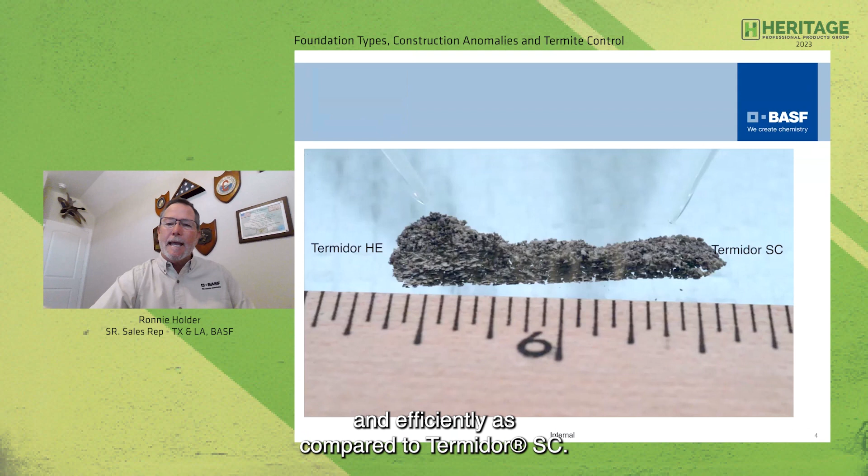So one thing I always like to do is show people this video of Termidor HE and how it works and penetrates into a termite shelter tube. Termidor HE has a proprietary BASF polymer that allows it to drag itself into that shelter tube much more quickly, thoroughly, and efficiently as compared to Termidor SC. On the left, we've got a drop of HE. On the right, we've got a drop of SC.

So you can imagine the benefit of using Termidor HE as it relates to the reduced volume that you put in the soil, the reduced trench size that you have to dig, and the reduced time it takes you to actually do a subterranean termite job. I especially like Termidor HE because if you foam with it, you're going to get penetration into a Formosan carton nest and/or an eastern subterranean termite shelter tube a lot quicker than with SC. So that might be something you want to consider putting in your arsenal as far as foaming inside of wall voids for subterranean termites.

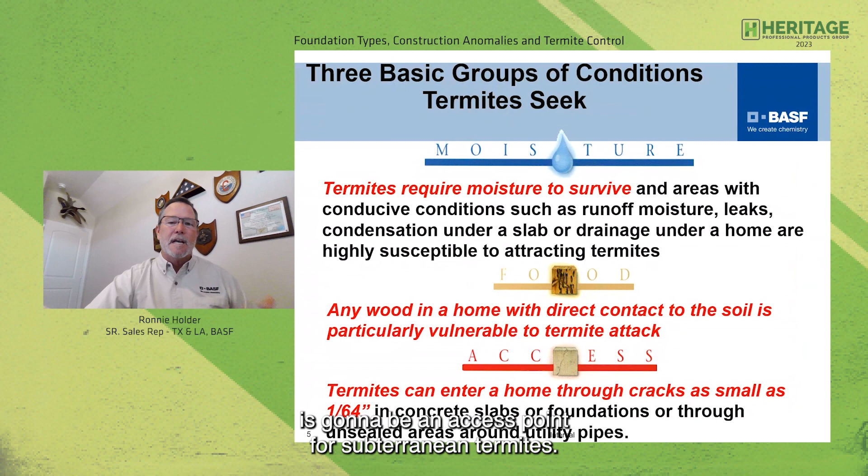So just like every living organism, termites need what? They need moisture, they need food, and they need access to the structure in order to get in there and find a food source, okay? We know that termites can enter a structure in a crack as small as 1/64th of an inch. So that means every plumbing penetration, every potential crack, any potential slab penetration is going to be an access point for subterranean termites.

So when Mrs. Jones calls you out and she needs a termite estimate, there's a few things you need to figure out. Number one, is it a curative treatment? Number two, is it a preventative treatment? If it's a curative treatment, we certainly want to identify where the termites are coming from, if at all possible. And then there's other things we need to consider.

What type of construction is this? Is this a slab? Is this a floating slab? Is there a basement? And one thing I always like to do is look at the roof line right here from this street view, because if there's a change in this roof line, it's very possible that we could have an addition onto that structure. And if there's an addition, we all know that that's a potential expansion joint where the two separate pours of concrete come together, which can be a major access point for some subterranean termites.

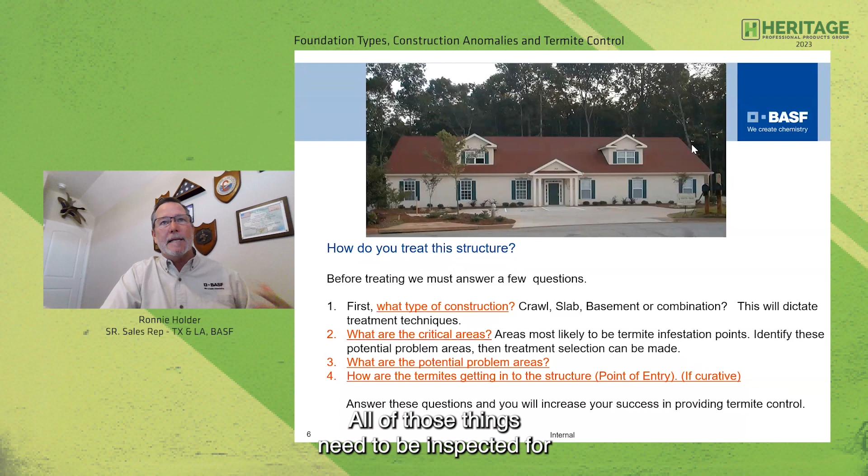We want to understand the conducive conditions. Is the soil too high? Am I able to access the slab and make a thorough inspection around the whole entire exterior perimeter of that structure? What are the critical areas? What are the potential problem areas? Is there wood rot? Is there a leaking roof? Does the chimney leak? All of those things need to be inspected for, as well as identified and documented on your paperwork.

We always want to recommend that Mrs. Jones move that wood pile outside and away from that structure, so she's not drawing subterranean termites, carpenter ants, wood boring beetles, or anything that close to the structure.

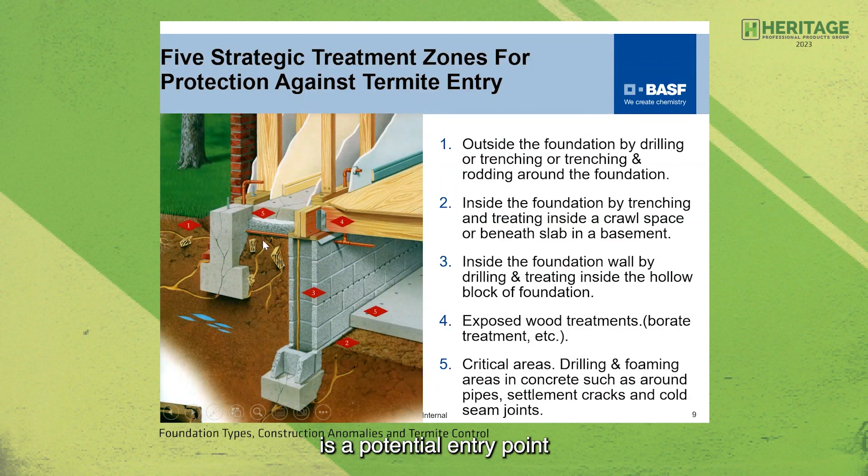So that means we have an expansion joint all the way around the interior of that structure. Also, potential entry points are the hollow blocks themselves. Every place that you see a red diamond is a potential entry point as well as a potential treatment point.

Okay, so let's take a look at some of the tools. Obviously, we needed graph paper, pencil, ruler, clipboard for the diagram. The diagram should have the outline of the structure as well as location of existing damage, tunnels, wings, or active subterranean termites or even drywood termites.

This is the big one right here: evidence of other wood-destroying organisms. So as a pest control professional, the TDA and Oklahoma Department of Agriculture, most all of your government entities require that you document other wood-destroying organisms. That would include drywood termites, carpenter ants, or wood-boring beetles.

Need to note the conducive conditions. Those are conditions that need to be corrected if at all possible to prevent the subterranean termites from living in, so let's say a windowsill that's been leaking and we've got moisture in that area. The termites could be living in from that moisture and not returning to the soil where your treatment would normally be.

Once again, we want to document any expansion joints, changes in the grade. If you're in the rural areas, location of wells or cisterns is very critical, because if there's a well or a cistern, chances are there's only a few products, and they're mainly baits, that I could actually use to solve subterranean termites in a well house on a structure.

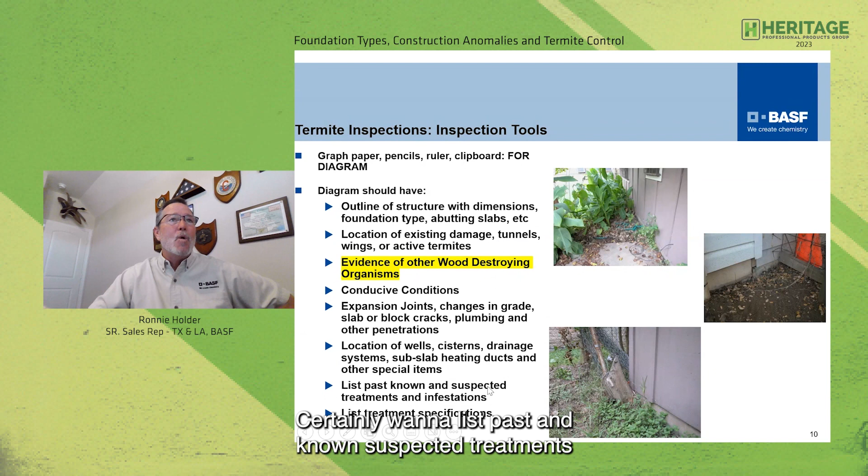Certainly want to list past and known suspected treatments and infestations. And then we want to certainly list the treatment specifications.

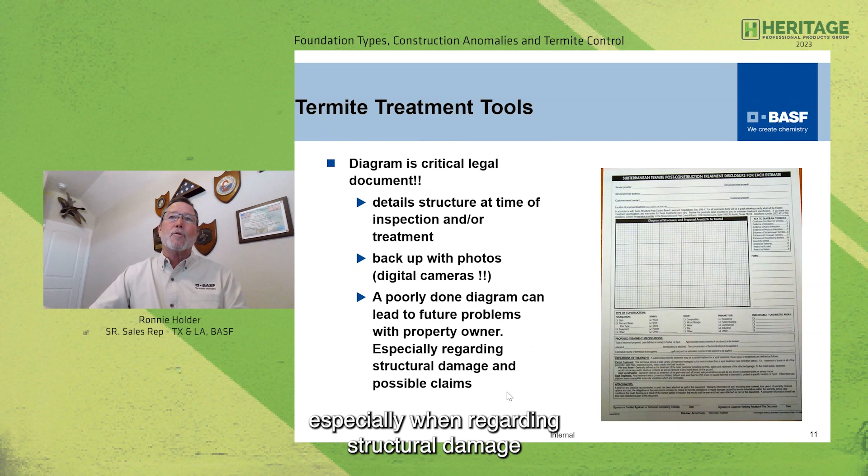So if you're going to get sued for a termite job, what's the first thing the attorneys are going to ask for? Number one, they're going to ask for your subterranean termite service agreement as well as the diagram. In today's world, we can back up our diagrams with pictures because every one of us has a camera on our phone. This document, along with several pictures showing conducive conditions, areas of activity, and anything critical to this structure, should be attached to that. The main thing to remember is a poorly done diagram can lead to future problems with the property owner, especially regarding structural damage and possible claims.

So let's take a look at some real world diagrams. I promise you, I have gotten these over the years, and these were left with customers that PMPs actually proposed subterranean termite treatments for.

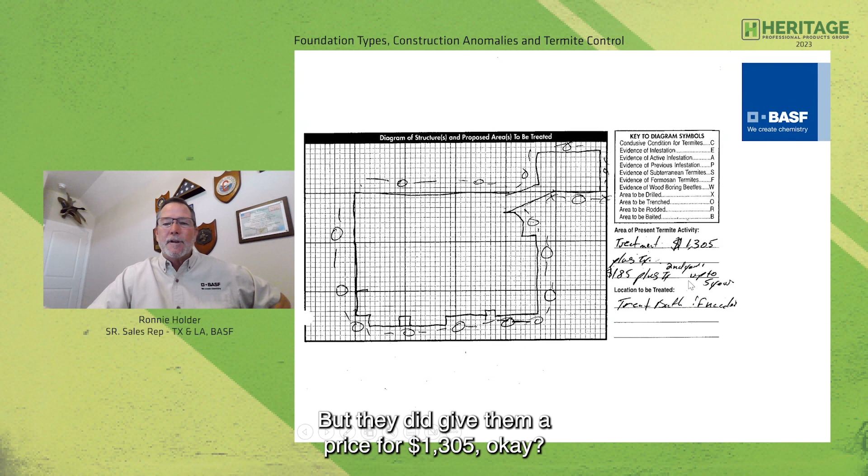Number one, my 8-year-old granddaughter could draw a better diagram than this. Let's use a ruler, keep it neat, keep it straight. And we're certainly missing all of the linear footage. But they did give them a price for $1,305, with a $185 annual renewal. Where's the bath trap? Where are any of the plumbing penetrations in here? Did they even bother to inspect the attic?

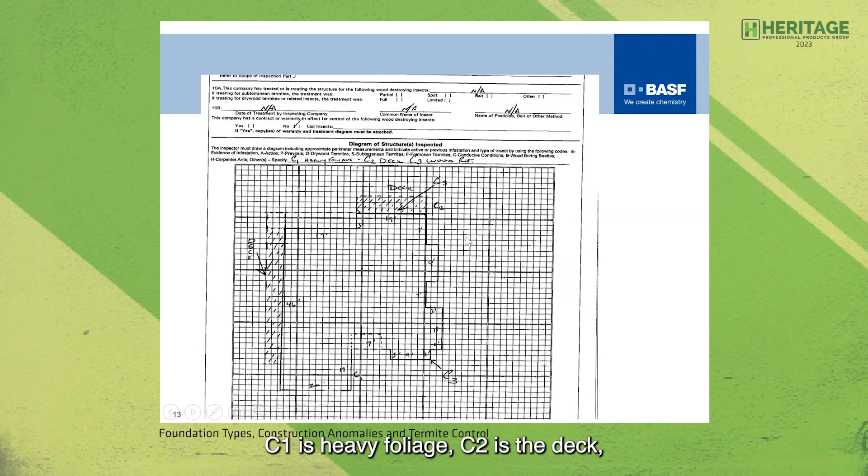This one here is pretty good. We've got a legend up here: C1 is heavy foliage, C2 is the deck, and C3 is wood rot. We've got our dimensions, our linear footages around the structure. So that's nice, neat, and clean. But here again, what am I missing? What about the inside? What about showers? What about bath traps or any other potential entry point for subterranean termites?

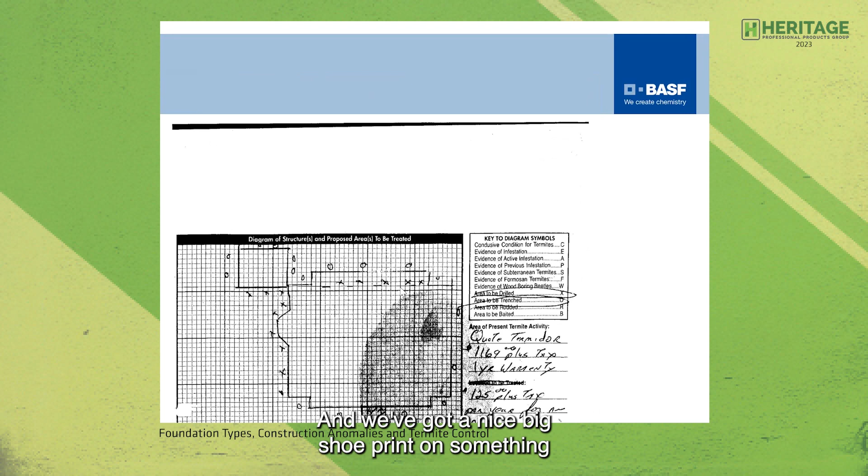If you ever leave Mrs. Jones an estimate with your boot print on it, shame on you. At the end of the day, obviously it was windy that day. The paperwork blew off the clipboard, and this person had to use their boot to actually stop it from blowing away. And we've got a nice big shoe print on something that we're going to actually leave with the customer. Not very professional.

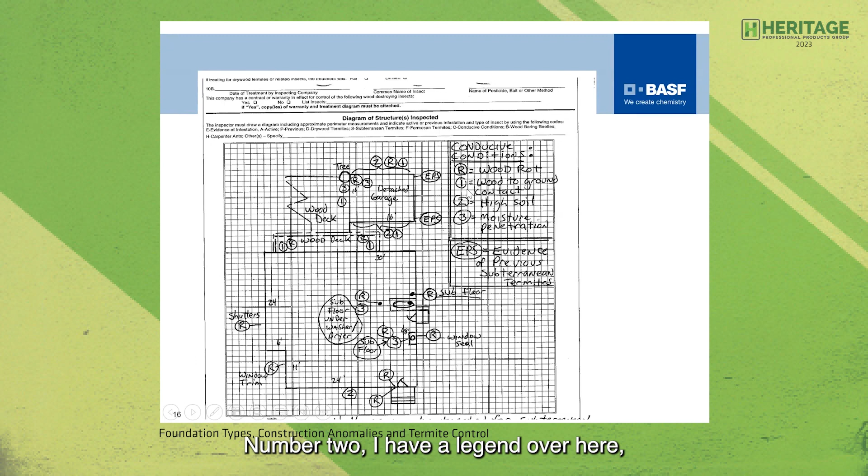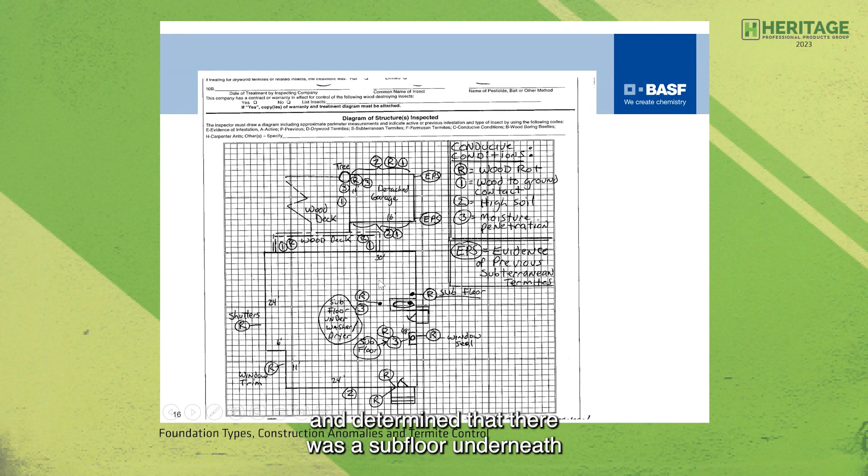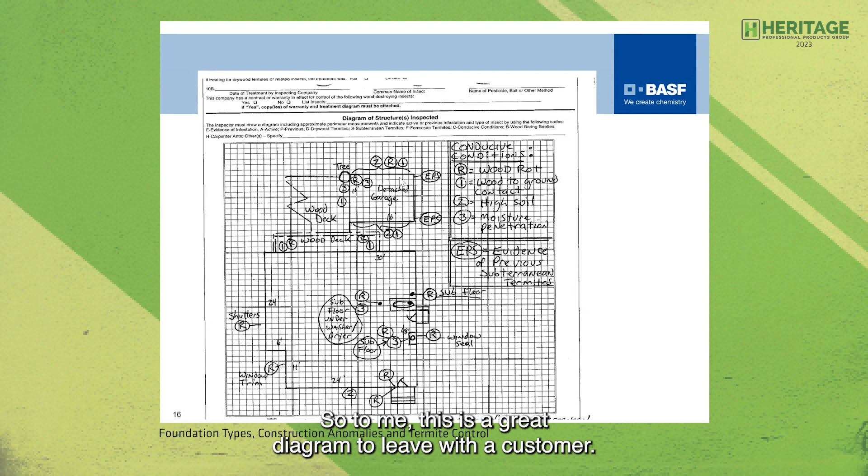To me, right here, this person has taken the time to give the homeowner a snapshot of what's going on around their structure. Number one, I've got a great clean diagram with linear footages on it. Number two, I have a legend over here where R is wood rot, and number one is wood to ground contact and high soil moisture penetrations. All of those are conducive conditions. And if you notice here, EPS is evidence of previous subterranean termites. We move over here into the house. They actually have the bath trap drawn. This person also inspected the washer and dryer area and determined there was a subfloor underneath that area. They've got the wooden deck marked up here with the detached garage, another wood deck, and then also all of the legends up here as far as what's going on. So to me, this is a great diagram to leave with a customer. You give them the estimate based on this, and chances are really, really good that you're going to win the day and win the job.

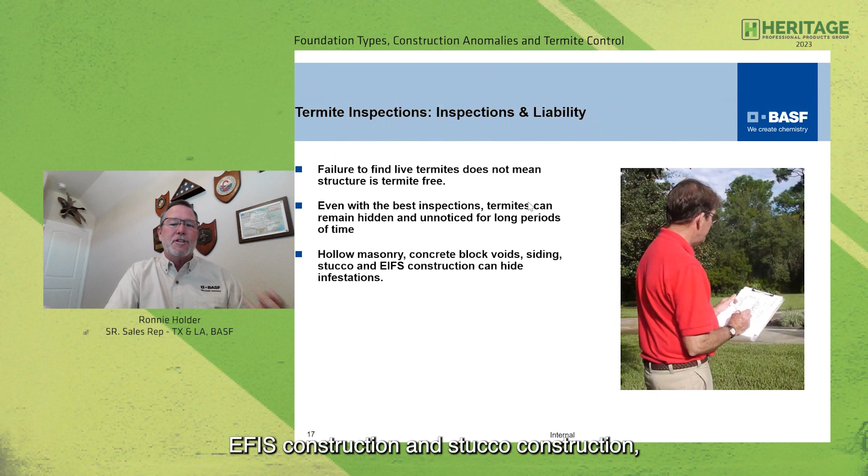Just because I don't find subterranean or drywood termites, do we tell the customer that their home is termite free? The answer is absolutely not. The reason is because even with the best inspections, even with moisture meters and FLIR guns and things like that, termites can remain hidden and unnoticed for long periods of time. Hollow masonry construction, like we saw on one of those first slides, with the floating slab and the hollow cinder block stem wall, those can hide areas of infestation. EIFS construction and stucco construction can hide termites in those areas, and even with the best inspection, we can never find them.

So I like this statement right here: the inspector puts himself and the company's integrity on the line every time an inspection is done. Make sure you document all damage, conducive conditions, and recommendations, and those need to be presented to the homeowner and or their agent. Follow the laws and regulations for whatever state you're in, whether it's Texas, Louisiana, Oklahoma, New Mexico, Florida, wherever you might be—follow the WDI regulations.

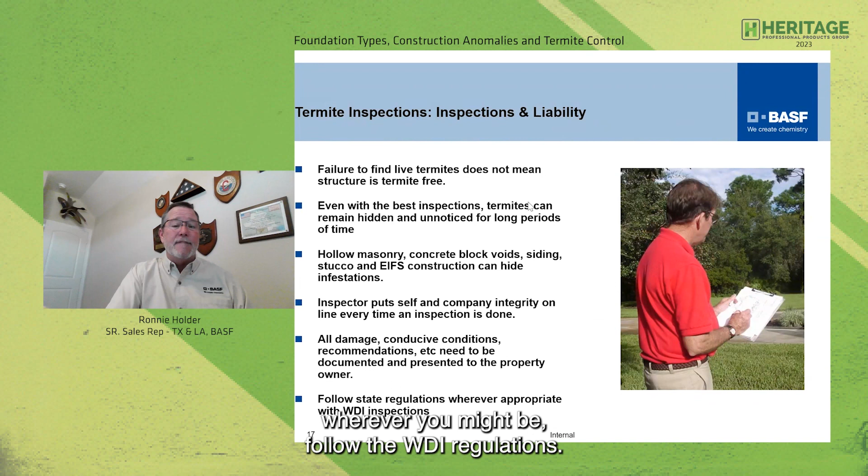So let's take a look at some simple construction terms. And one thing I want you to remember is that construction changes over time. Okay. So in the late 1800s, early 1900s, what was the primary construction type of residential structures? Well, it was a pier and beam, a crawl space structure, right? It wasn't until after the 30s, during the 30s, 40s, and 50s that they perfected the use of concrete to

start making slabs. Okay. So the older the neighborhood that you're in, the more likely you're going to have pier and beam construction. And as newer neighborhoods get built, the construction type changes over time. So just be sure to kind of understand what part of town you're in. Is it new construction? Is it older construction? And document from there.

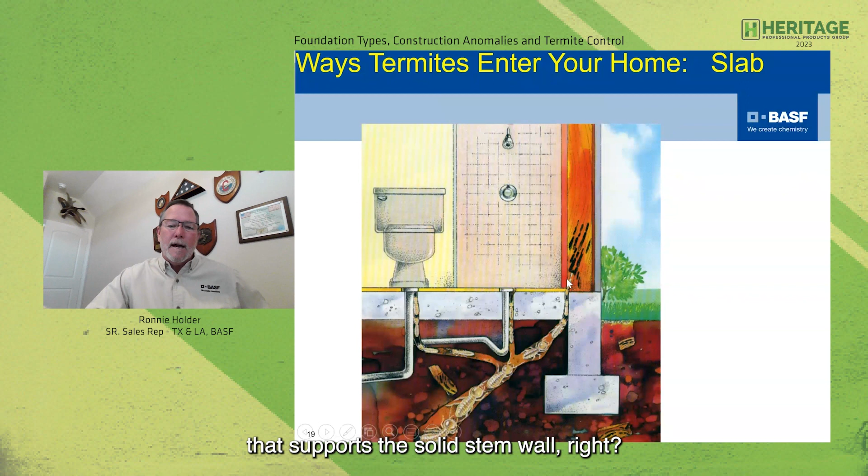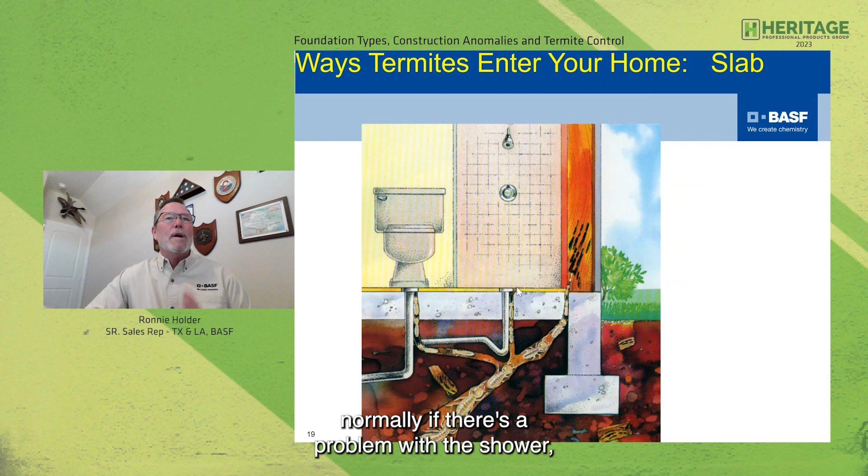This is a great picture of a floating slab. On the right-hand side, we've got a footing that supports the solid stem wall, right? And then you've got that expansion joint all the way around the interior of the structure. So our entry points include that expansion joint on the inside. It includes any plumbing penetration, okay? Commodes, probably not the shower. Normally, if there's a problem with the shower, it's due to a leaking shower pan.

Okay. So back in the 50s, 60s, 70s, they had shower pans made out of galvanized. And then once the mortar on the floor of the shower started giving away and losing its seal, guess what? It would drip onto that galvanized pan. It would rot out that pan. And then the moisture would leak into the form boards that form out the wall of the shower as well as the floor. So if you have problems with subterranean termites in the shower, never come here and drill a hole right next to the shower drain. And the reason for that is you could be drilling a hole right through a shower pan.

So this is one of the most common building types that we see throughout the whole country, really, is a monolithic slab. Mono means one. That means all of the slab was poured at one time. So what are my potential entry points? Certainly the exterior perimeter, okay, especially anytime you've got a 90-degree angle in the slab. Termites love those corners. Any penetration through that slab, whether it's a drain line, water lines, electrical lines, anything like that is a potential entry point. And then if this monolithic slab cracks, any crack could be a potential entry point.

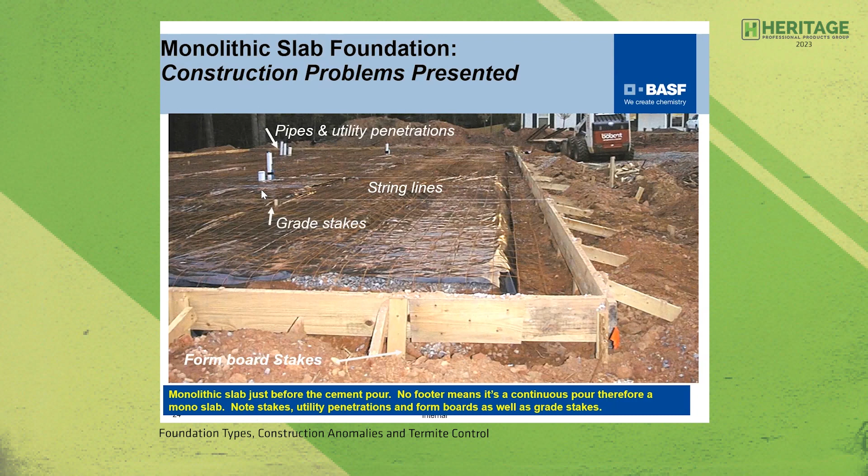So let's see what happens after they pour the slab. Oh, well, guess what? They didn't pour it high enough to cover these two grade stakes. So we said first on that termites need what? Number one, moisture, which is the soil. Number two, they need access, which is going to be these grade stakes. And number three, they need a food source, which is also going to be these grade stakes.

Now, here in the state of Texas, it's not required that pre-treats be done on residential structures unless it's certain municipalities that require that. So what's the contractor going to do? He's basically going to grind these down off even, and he might put a little mortar mix over the top of them, but it's doubtful. I mean, the foreman might not even be on the job.

So after the concrete's cured, they're going to put up their walls. They're going to put down their carpet and the pad underneath. And you will never know that food source and entry point is right there. I mean, there could be a wall right over either one of these grade stakes, and you would never know that it's there. So it's these construction anomalies that we need to be concerned with.

So normally when we do a termite job and we're using Termidor, we do it one time and then we solve the problem right away. It's that second and third year, if you still have issues, you need to start thinking outside of the box to determine what could have happened during the construction process that's still causing these subterranean termites to be active and prevalent in the structure.

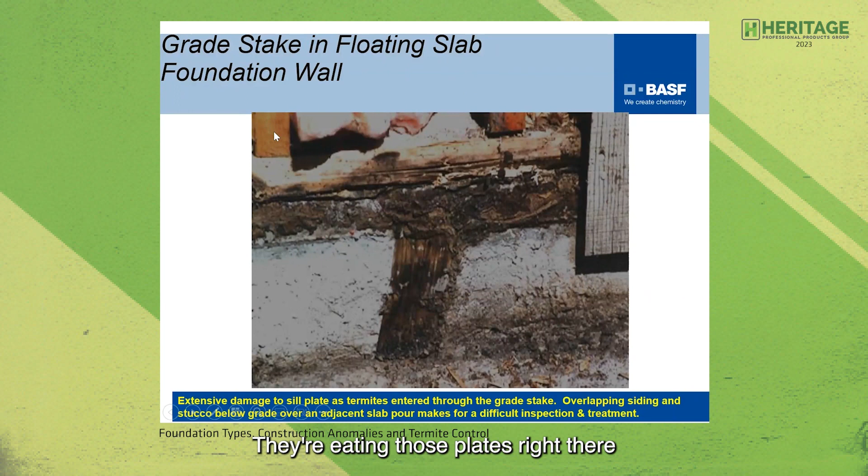This is a great slide of a grade stake left in the ground in the slab. So number one, we've got food source, we've got moisture, we've got access. They're eating this grade stake, and now guess what? They're eating those plates right there that support the studs, and eventually they'll come and start eating on the studs as well.

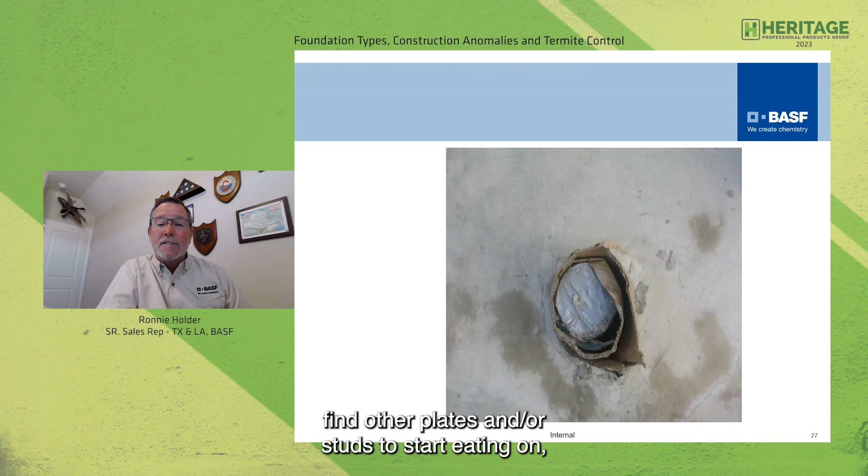They love the heck out of it, especially if it's got moisture in it, and that would be a great place for subterranean termites. Number one, to access the structure, find other plates and or studs to start eating on, and chances are you'll never even know that that's there.

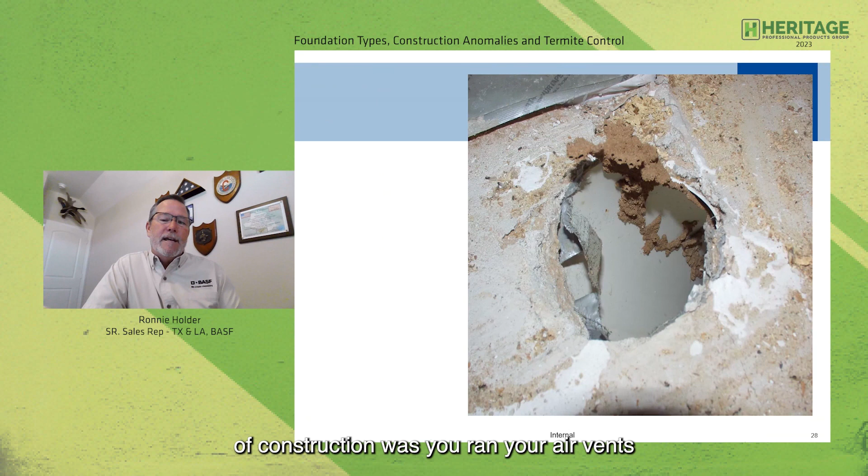So this is some construction from Oklahoma. Years ago, I covered Oklahoma for BASF. And for many years, the Oklahoma standard of construction was you ran your air vents and air ducts through the slab. Okay. So what they do is they'd hook these galvanized pipes up for the ventilation system for the structure, and then they'd pour the concrete.

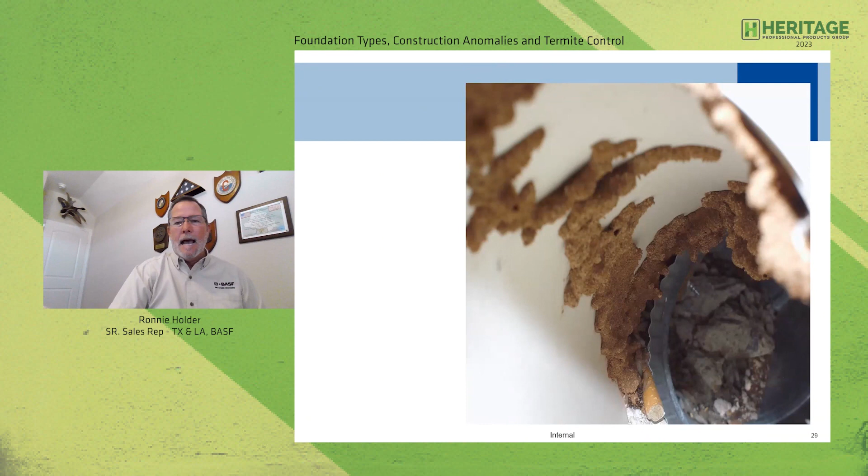Well, what happens to galvanized over time? It tends to rust out, right? And then anytime you've got two pieces of galvanized come together, guess what? There's enough of a gap for the subterranean termites to get into those areas as well. Notice here how they put the PVC attached to the galvanized. And I like the fact that the contractor left his Marlboro cigarette butt right here for the consumer as well.

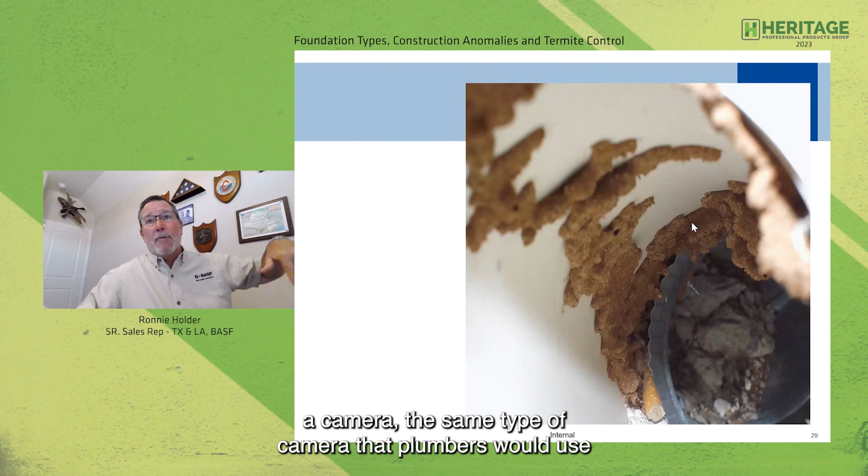So how do you treat these things? I had a very good customer in Edmond that used to use a camera, the same type of camera that plumbers would use to inspect the sewer lines and things like that. He would put a camera down in here to figure out exactly where the subterranean termites were coming from. And then he would drill holes, very tiny 1/4-inch holes, and then treat those areas in and around where the subterranean termites were.

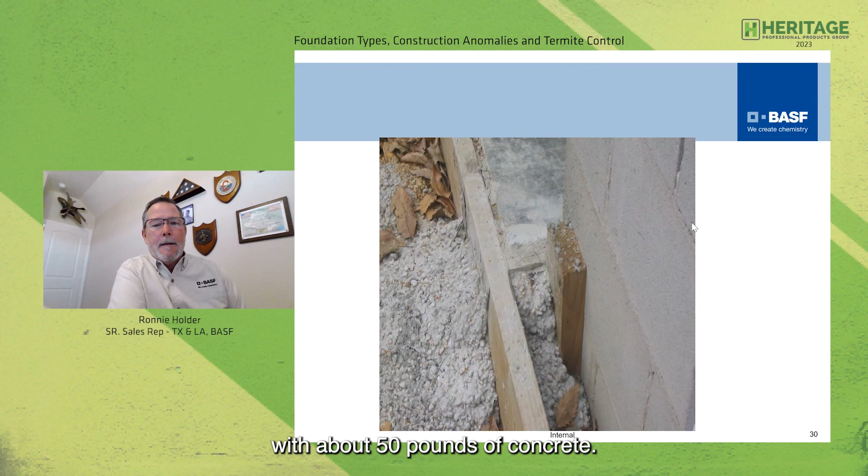So this is a great picture. We've got form boards left in place, encased with about 50 pounds of concrete. What do you think is going to happen here? Well, when I came back 3 months later after they had finished the house on this picture, the contractor had put 2 feet of soil right over this area and then put landscape material on top of it and called it a flower bed.

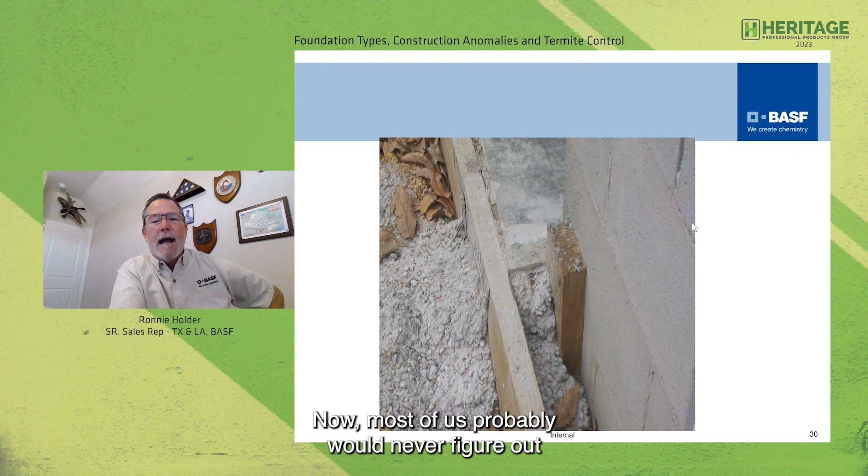Now, most of us probably would never figure out that this is there, but with this hollow block construction, we know that those mortar joints can always crack, and there can be cracks in the blocks themselves, and those are great entry points for subterranean termites.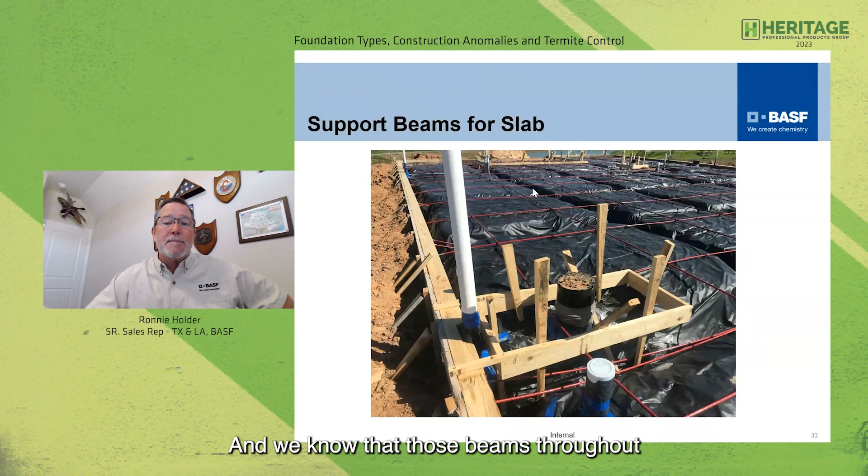Notice here, this is probably going to be a commode, too small to be a shower. Notice the vent pipe up here and all of the grade stakes protruding down through here. And right here is a great portion of where those beams are. Those beams throughout these monolithic slabs are designed to support the load-bearing walls of the building. There's another good picture. Notice we still have a big footing right down here along the entire exterior perimeter of the structure.

So let's say we don't know what type of structure it is. We think it's a monolithic slab. That's fine. How do I determine if it's a post-tension slab? Well, the telltale signs are these pock marks right here. Remember the cable extending out through the support wall? They come back after the slab is poured, cut those off with bolt cutters, and then put some mortar mix over the top of those holes to make it look a little better.

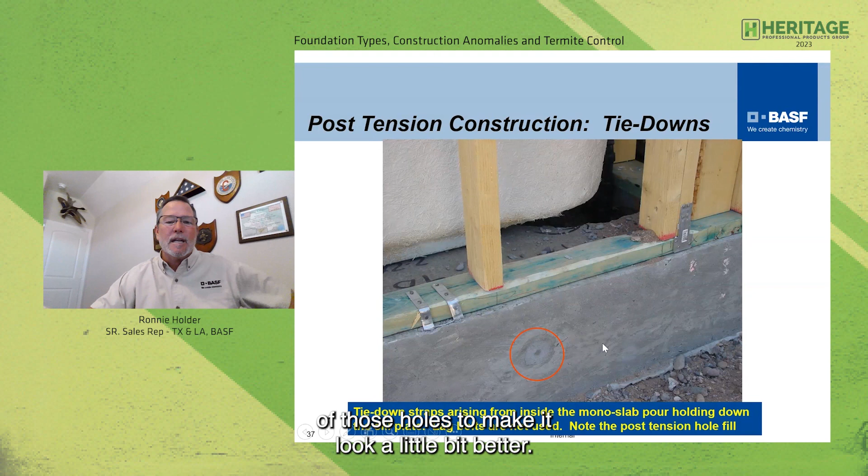Here's another great picture. This is newer construction. Notice right here I've got two straps close together. Here's another pock mark, so that should tell me this is a post-tension construction slab. Why is that important for me to understand? Because if I want to drill down into that slab and I hit one of those cables, it could be big, big trouble. We never want to try to drill a post-tension monolithic construction slab, if at all possible.

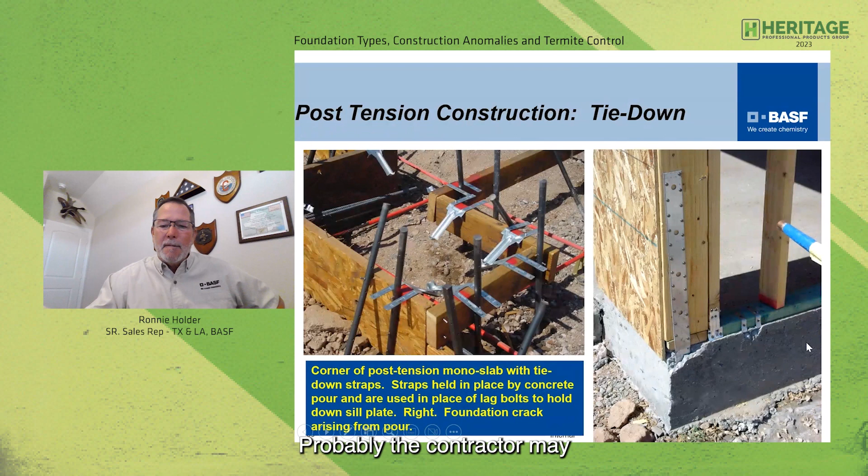There's more pictures. You've got these tie downs here that help support the support walls, and you see how everything's tied in together. And over here, we've got a nice big crack. The contractor may or may not do something about it, but they're definitely going to put soil and mulch in and around this area. So this might be an area that we never see.

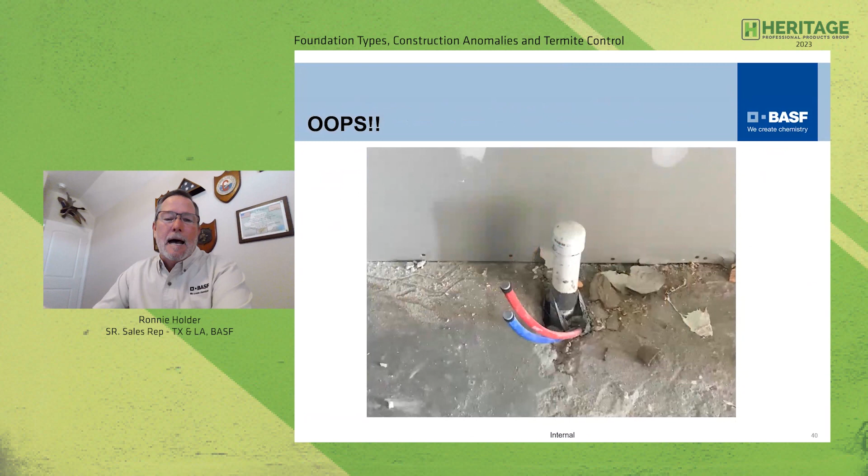So what do I have here? This is brand new construction about two miles from my house. I recommend that if you're new to the termite industry, or even if you've been there 40 years, go out on a Sunday, before or after church, to a brand new neighborhood and just walk around and look at how they're building houses today.

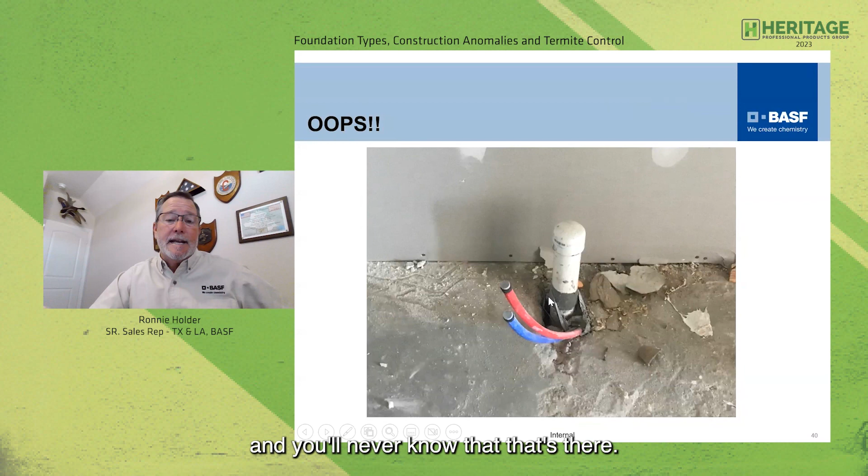The blue line is a cold water supply line. The red line is a hot water supply line. Then I've got a drain. And if you look right down here, that is a huge 3-inch gaping hole that subterranean termites can access very easily. So what's the contractor going to do? He's going to put a cabinet over there, tie a sink into that drain line, run the supply lines up into the faucets, and you'll never know that's there. And since this is Texas and we don't have pre-treats, this could be a huge issue at some point in the future.

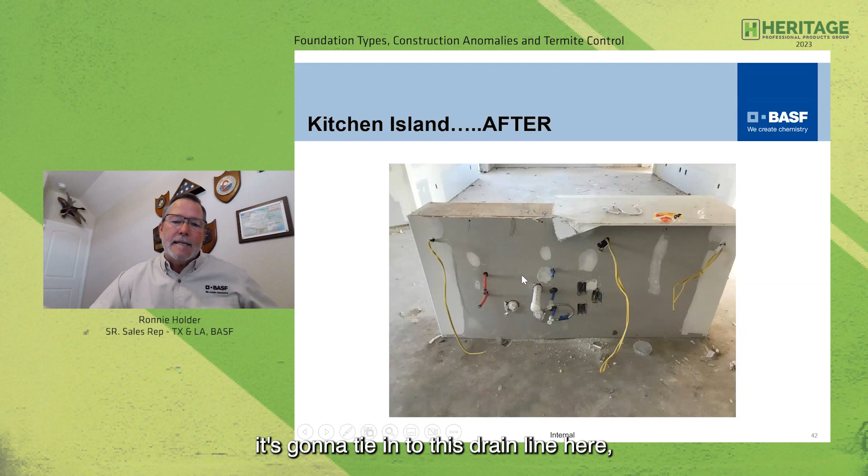Of course, they're going to put a big slab of granite on here, put a sink in here, and it's going to tie into this drain line. And you've got a major issue if you ever get subterranean termites in this type of area.

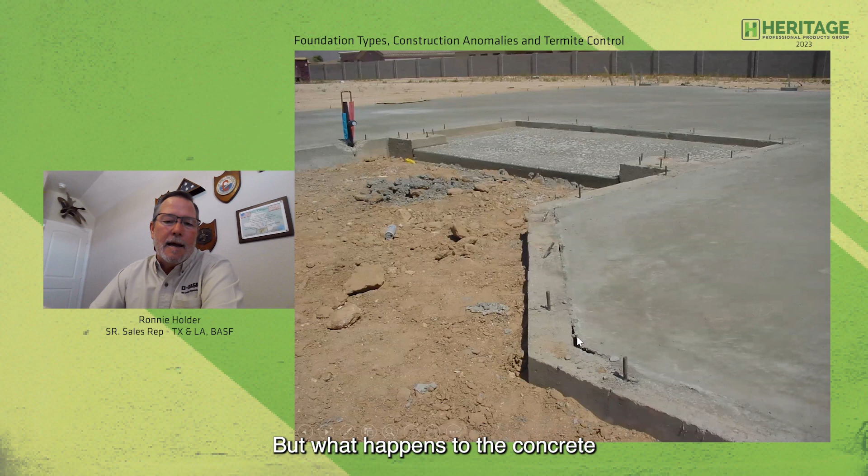There's a good picture of it. Notice down here in the center, lower center, I've got another great big gaping hole. Contractor, what's he going to do? Maybe he'll fill that up with mortar mix. But what happens to concrete or mortar mix as it dries? It shrinks. And we already said that it only takes 1/64 of an inch for subterranean termites to gain access to the structure.

Here's a nice one. So what happens is when you pour your perimeter wall, you set your anchor bolts where your 2x6s or 2x4s are going to go. You set them while the concrete is drying. Well, these folks decided to come back and drill that stem wall. And when they drilled the stem wall and put the anchor bolt in, guess what? Got another huge crack down here on the bottom, on the outside edge of that stem wall.

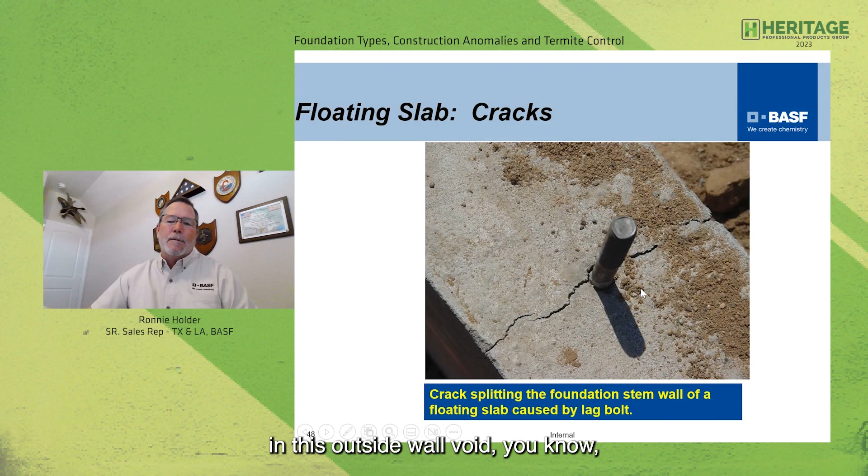They're going to try to cover it up, make it look nice. But guess what happens on the top? Is that a 64th of an inch? Absolutely. So they're going to put that plate right over that anchor bolt. And if you get subterranean termites in this outside wall void, you'll get lucky if you're ever able to solve that problem.

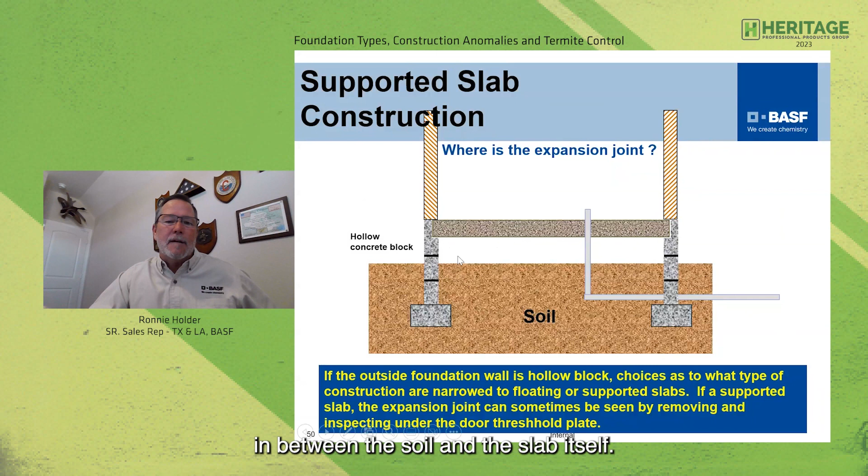Another type of slab is called a supported slab. I personally have never seen one of these. I think they're in my territory up in the Shreveport, Louisiana area. So what they do is when they do their stem wall, they do not pack the soil down here before they pour this slab. And what happens is they expect to have a gap in between the soil and the slab itself. That gap could be anywhere from 6 inches to a foot.

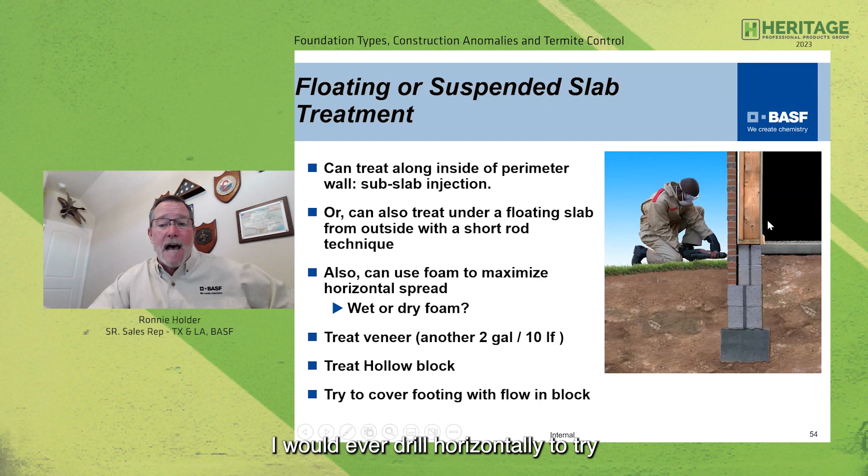Sometimes if we have floating slabs, we can treat them from the exterior perimeter. But then we have to think, we've got to go through the brick veneer. We've got to go through the cinder blocks to make sure that our termiticide gets into that expansion joint. Now, why would I do this? What if Mrs. Jones has tile or hardwood floor inside this room right here? That's probably the only reason I would ever drill horizontally to try to treat that expansion joint on the inside of the structure.

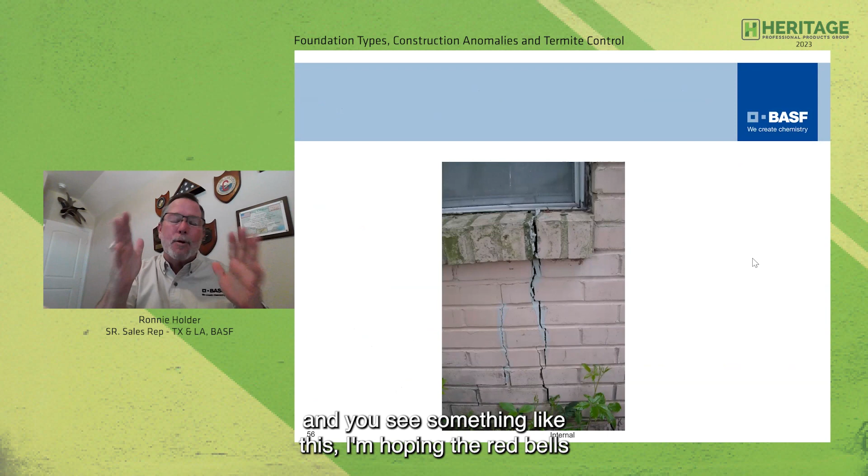If you're doing an inspection and an estimate and you see something like this, I'm hoping the red bells and whistles are going off in your head, because this screams foundation issues. If we're lucky, we can go inside. Maybe there's carpet in that adjacent room, and we could pull the carpet back to understand if there's a crack in that slab. If there is, there's certainly remedial measures we can take, like drilling and treating that crack to prevent or cure termites that might already be there.

Basements. We don't run into too many basements down here along the Gulf Coast. I know the further north you move, up into the Midwest and places like that, basements are very common. Believe it or not, there were basements in Arizona too - that was pretty strange construction to me. But basements can give you a lot of problems, because bottom line, they're basically a floating slab with a lot of cinder blocks, maybe some stem walls as well.

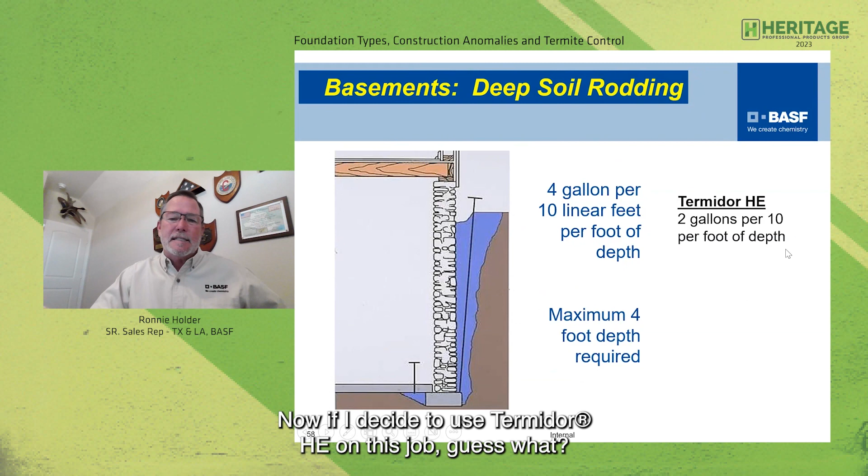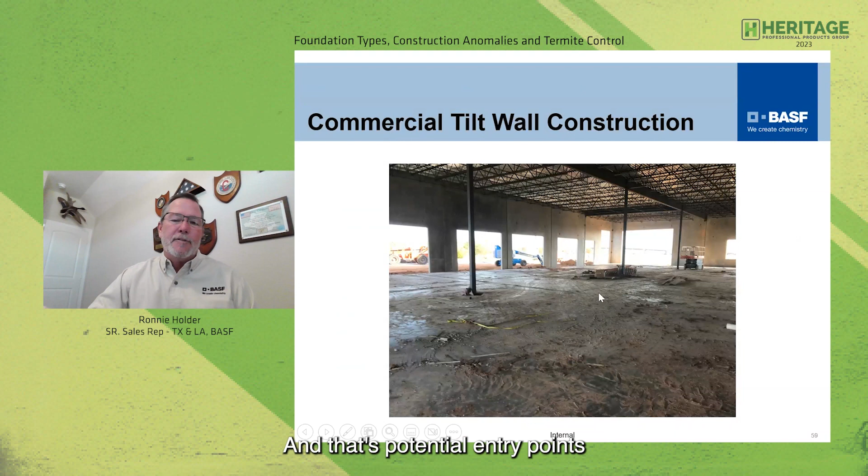Let's talk a little bit about commercial construction. This is tilt wall construction - most everybody's probably seen this. You probably have accounts of this type that have the dock doors and everything like that. Well, the way they build these is, number one, they pour the slabs first, and these slabs are basically in 25-foot squares. They're all tied together, and every place you see a center post supporting the ceiling, that is where 4 pieces of concrete come together - and that's a potential entry point for our subterranean termites.

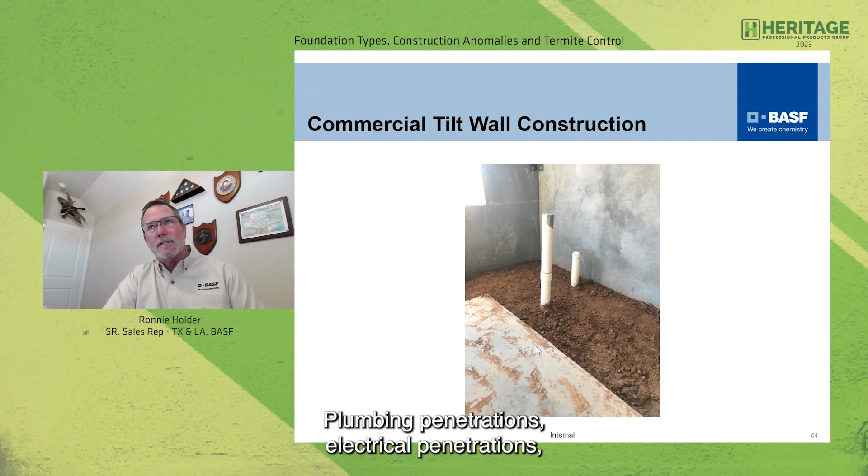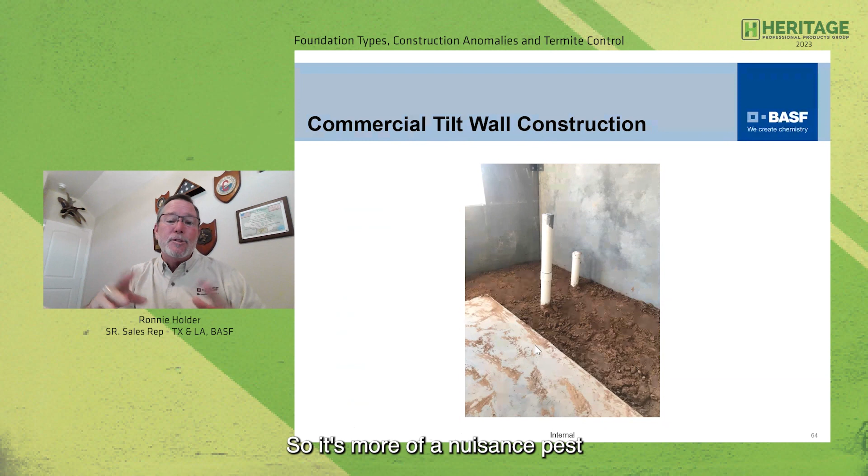When we look at this building, there's nothing for them to eat, right? The only thing they're going to eat is basically any wooden pallets on the floor, or maybe they'll eat the paper off the sheetrock, because generally in this type of construction, all of your studs are aluminum studs used to build out the offices and everything. So it's more of a nuisance pest than a structural pest, unless they're eating the cardboard boxes full of papers on the wooden pallet on the ground. So just be aware there's lots of places we can treat on this tilt wall type of construction.

So lots going on in this slide. The bottom line is every place you see red is a potential entry point and a potential treatment point. So it's critical that we understand what type of construction we have. Are there multiple types of construction? Is there a crawl space with a slab attached to it? Are there grade stakes left in place? Are there cracks in the slabs? We know there's always plumbing and electrical penetrations.

And the thing we also know is that termites follow straight lines. So if there's an electrical conduit or a plumbing conduit coming in under the structure, termites will follow those. They'll follow tree roots under the structure and then try to find a crack to get up inside, whether it's a residential or commercial structure.

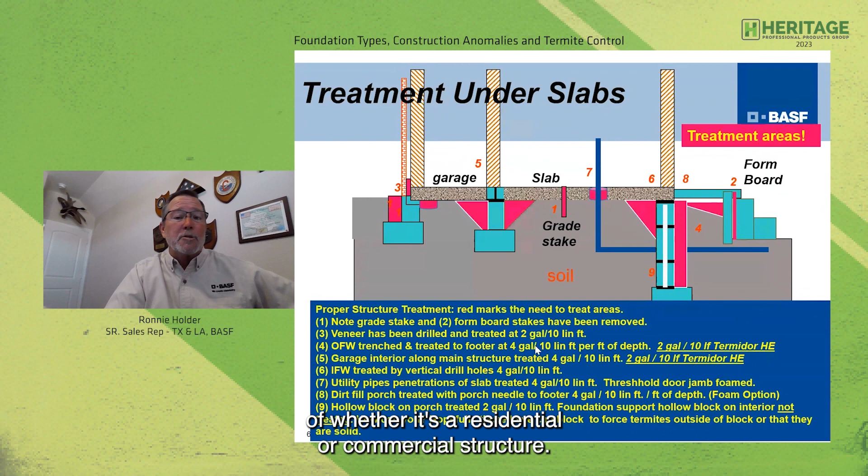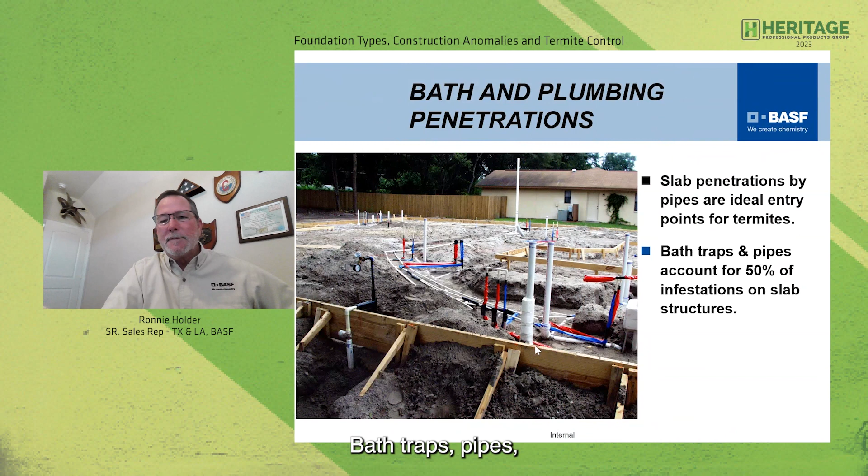Bath traps, by all means, access and inspect them. If you can access and inspect a bath trap, please treat it. We know that over 50% of interior infestations come from bath traps, pipes, and other plumbing penetrations.

Notice this house was built probably in the 90s, early 2000s. Look at all the plumbing. What is it? PVC and plastic, right? Back in the 50s and 60s they were using copper and cast iron. So now if we want to down drill any of this, there are potential problems if I hit a water supply line or a plastic drain line or anything like that.

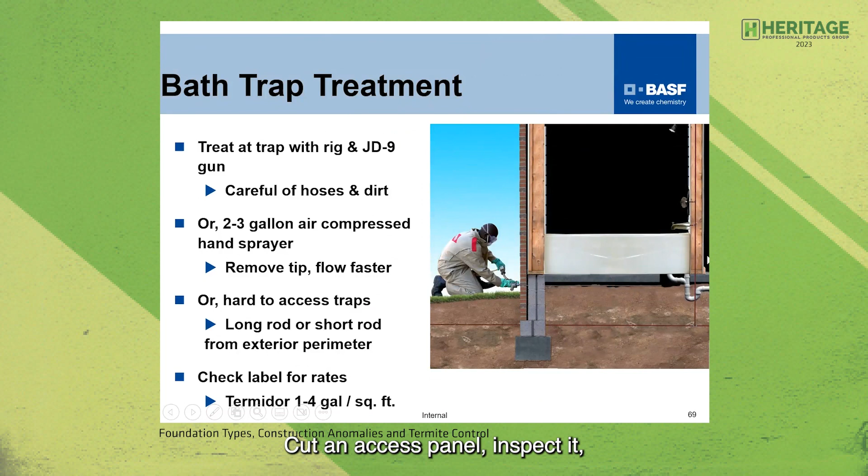Bath trap treatments. There are several ways to treat a bath trap. If it's me, I'm not going to drill from the outside to get to that bath trap. Hopefully there's a closet on the right-hand side, and I can convince Mrs. Jones of the need to cut an access panel, inspect it, treat it, and then I can inspect that area again next year for her one-year termite renewal.

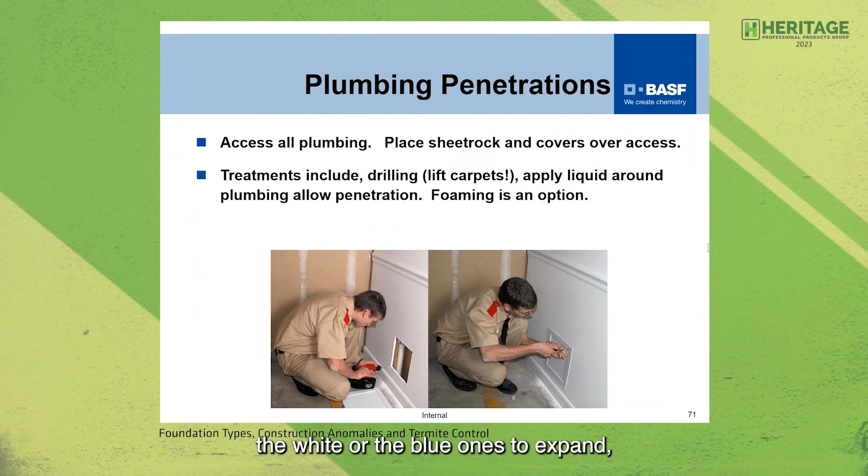Here's a good picture of cutting a bath trap. On the left you'll notice the plumbing penetration, and there's also a stud to screw that bath trap into. If we don't have studs to screw the bath trap panel in, we can always use molly bolts, the white or blue ones, to expand so the bath trap looks good and stays in place.

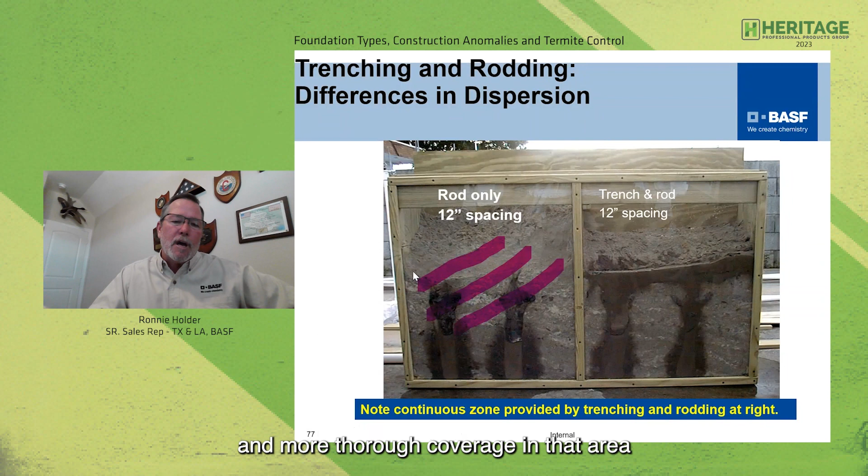Our termiticide labels are very clear. It says to trench and rod into the trench. However, sometimes rodding only may be done in certain circumstances. So if Mrs. Jones has 30-year-old wax leaf ligustrums 2 feet from her structure, chances are you will never dig a trench, so then I can rod. On the left-hand side it shows rodding straight up and down, leaving columns of termiticide, meaning I could have gaps every 12 inches where I rod. For me, I prefer to rod with a 360-degree tip at a 45-degree angle to create better, more thorough coverage in that area that I cannot trench.

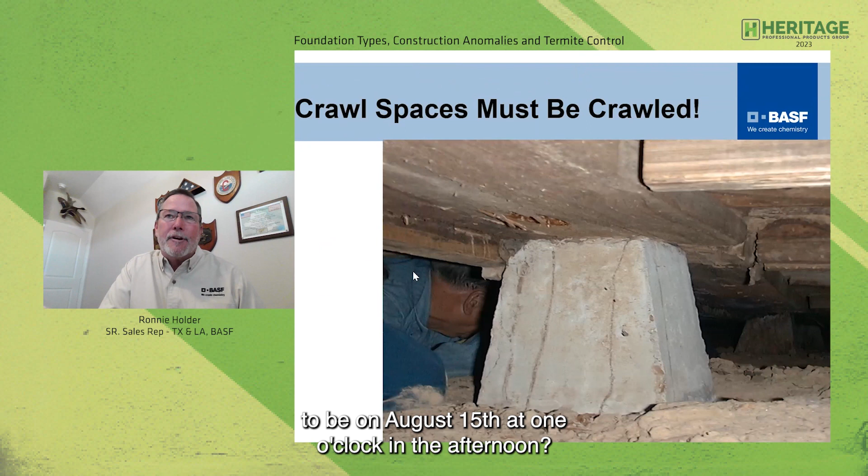Crawl spaces must be crawled. I learned early on, when I was young doing crawl spaces for my grandfather, where's the best place to be on August 15th at 1 o'clock in the afternoon? Definitely underneath the crawl space, because it's nice and cool. There are multiple places termites can enter from these crawl spaces — the pipes, the plumbing, the brick veneer, all of that.

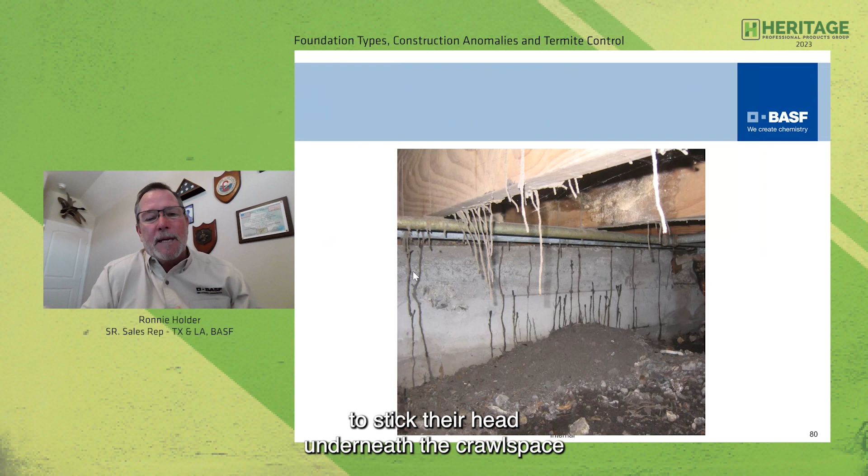This is one of the last houses I ever sold. It was an elderly couple in Northwest Houston who called us out for a termite estimate. I just barely stuck my head in there with my flashlight and went, oh my gosh. Another pest control company in Houston had been doing their quarterly pest control for 2 or 3 years, and none of those technicians ever bothered to stick their head underneath the crawl space where the door was on the outside. So even if you're doing general pest control, it might not hurt to every now and then stick your head underneath the crawl space just to check for an issue like this.

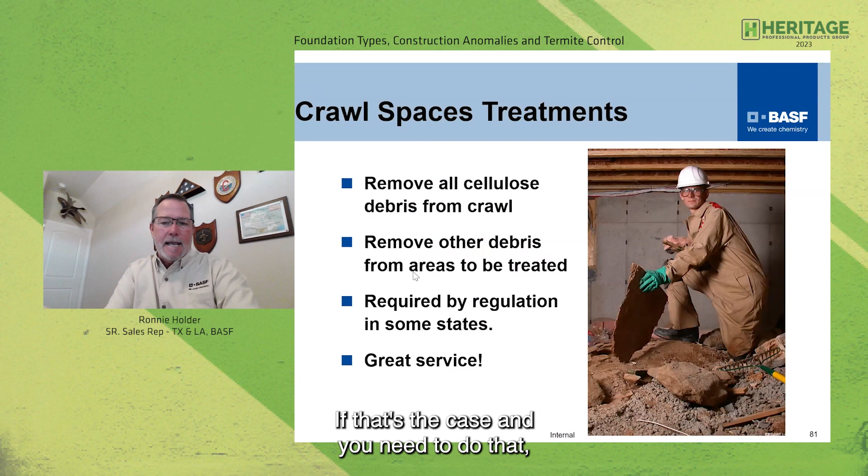This is not a crawl space — I've never been this lucky before in my life. But anyway, some states require that you remove all wooden debris from underneath the structure. If that's the case and you need to do that, you'd certainly want to charge for that service as well.

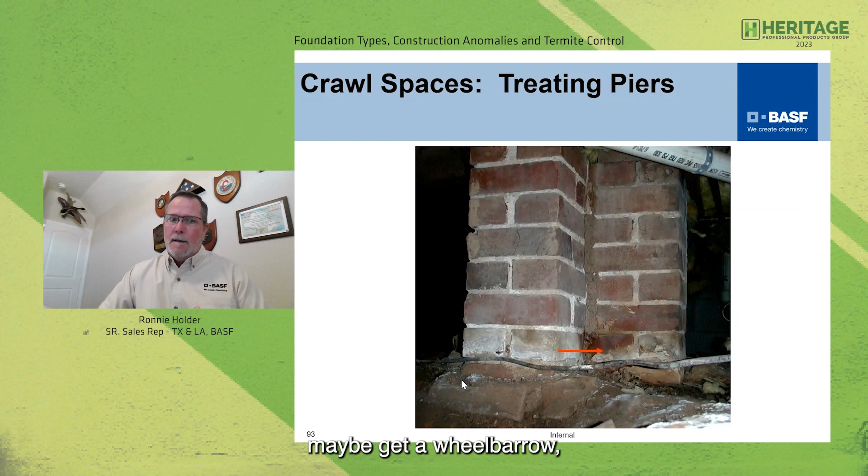Okay, I'm talking about treating piers. If you read your subterranean termite treatment label, it's going to say treat to the top of the footing. So this is actually in New Orleans in the French Quarter. Right here is the top of the footing. So this is another instance where I need to maybe get a wheelbarrow, go buy some dirt from Lowe's or Home Depot, mix up my termiticide with that dirt based on the cubic footage, bring that in here and pack this around this pier so I'm not trenching below the top of the footing and maybe causing structural support issues if I do that.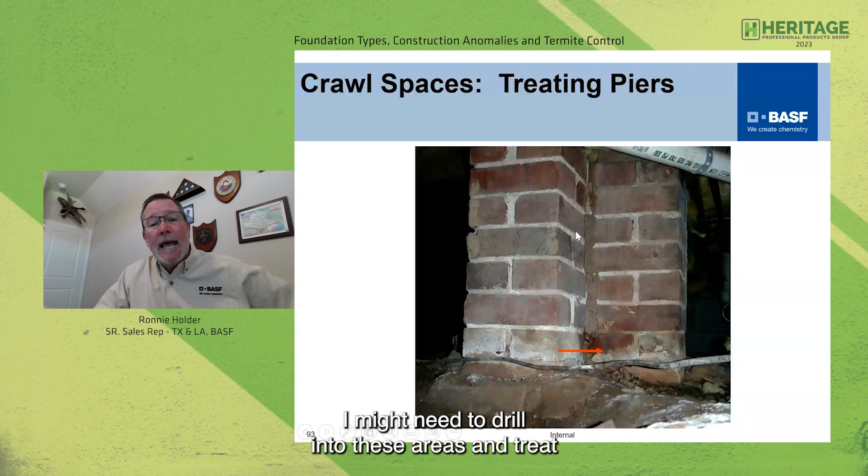The other thing I want to do is I want to rip down this Formosan tunnel right here, and I want to see if there's any cracks in this mortar. I can see a crack over here. I can see a crack over here. If that's hollow brick or there's voids in that mortar, I might need to drill into these areas and treat, and get our liquid termiticide inside of there as well.

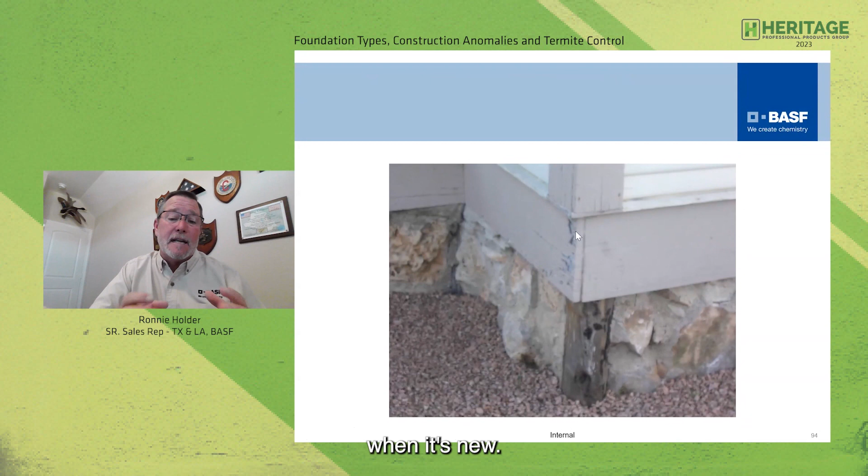Most people, unless you live in West Texas, don't see this type of construction too often. This is actually a cedar stump that is acting as a pier. I took this picture years ago. I think it was in Mason or Junction, somewhere way out in West Texas. And the entire crawl space had nothing but cedar piers. The beautiful thing about cedar, we all know that it's somewhat insect repellent when it's new. As it ages, guess what? It becomes, termites don't care.

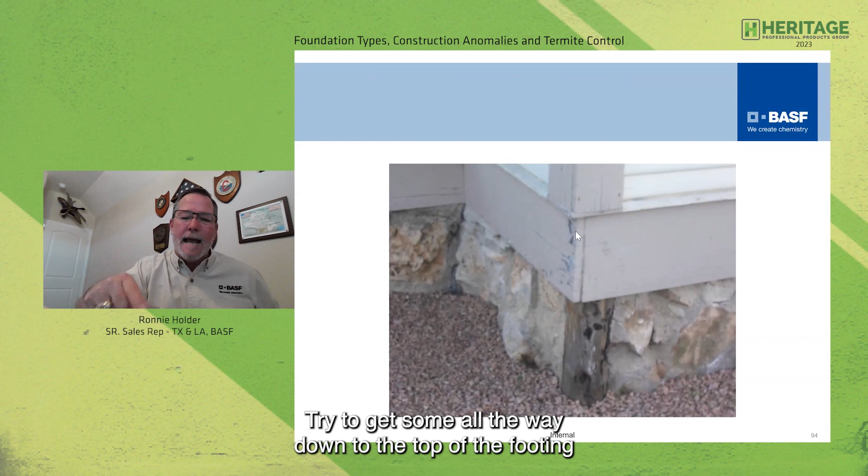And when these things rot out, it's just like a telephone pole or landscape timber. They rot out from the inside out. So if you run into a situation like this, make sure that you trench and rod down into that area. Try to get some all the way down to the top of the footing. And that way you can prevent the subterranean termites from going through the inside of that pier right there.

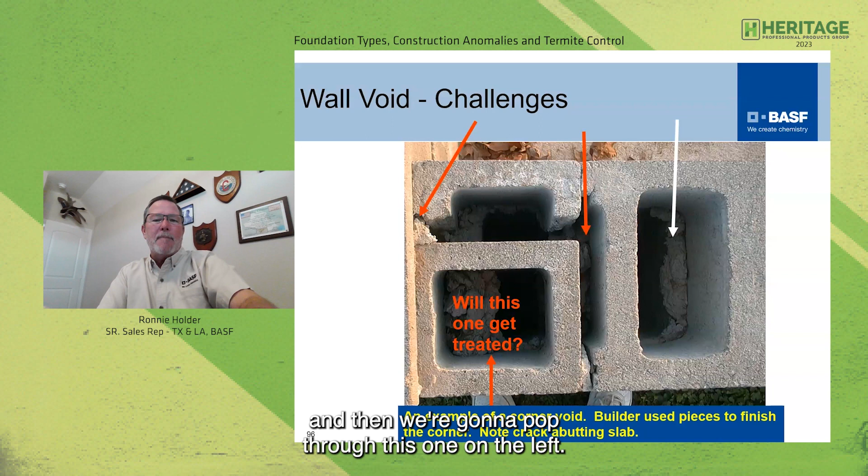Another example of what can happen with contractors, if you're treating hollow block, if anybody has ever treated hollow block, what you do is you drill through, and as soon as you feel it punch through, you pull it out immediately. So we know we've got two cell cinder blocks here. We treat the one cell on the right, then we're going to treat the joint because there's always a joint there, and then we're going to pop through this one on the left. But what about this one right here on the left-hand side? Is that ever going to receive any termiticide? So just another watch out.

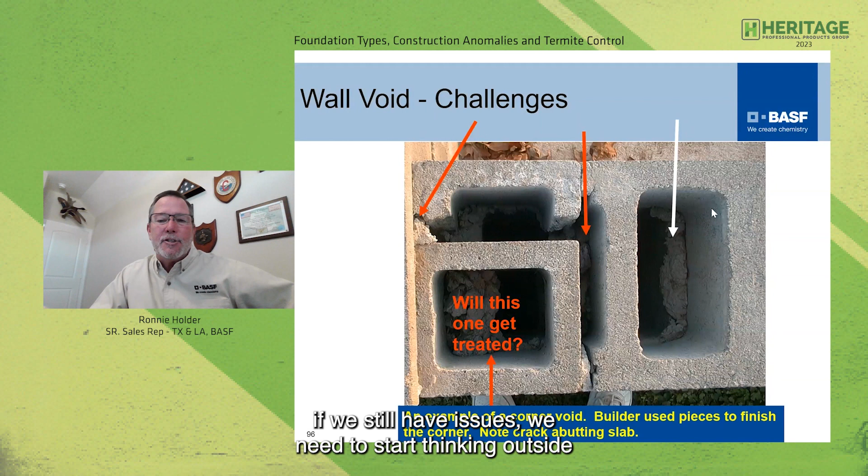98% of the jobs that we do is one and done. We do them, we solve the problem, etc. It's on that second or third year, if we still have issues, we need to start thinking outside of the box of what could be happening from a construction aspect.

Okay, what's behind the wall? Brick veneers, huge gaps, right? We know that cinder blocks can crack. We know that they have mortar joints that can crack. So lots of areas for termites to enter the structure.

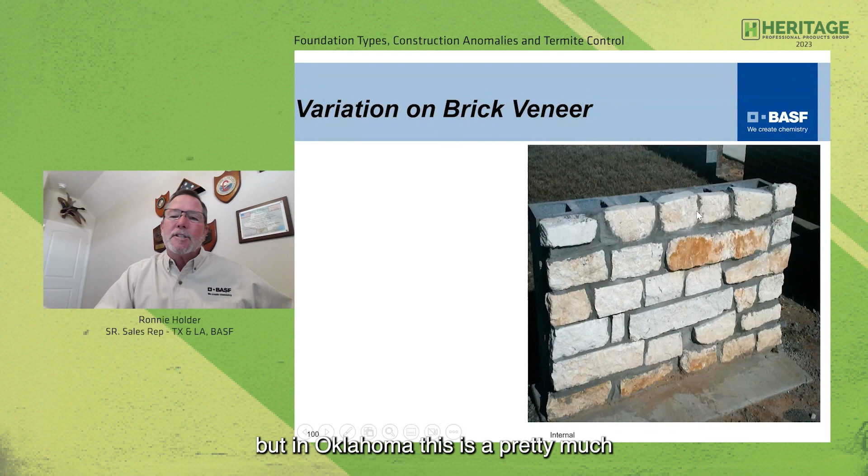Okay, this is a good one. You see a lot of these rock walls, mostly down here in Texas. We don't put cinder block behind them, but in Oklahoma, this is a pretty much common building practice where you've got your cinder blocks and then they put this false stone wall in front of it. So lots of areas on this one as well.

Okay, foam. My gosh, I love foam. Foaming is one of the best tools, and it's been around for 20 years, but now that we have non-repellent termiticides, foaming is a great addition to any job that you'll ever do.

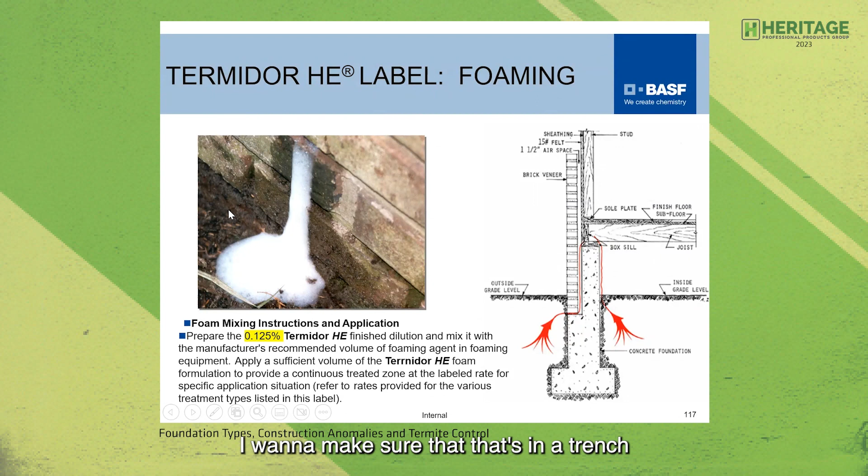And I certainly don't want to leave this exposed. I want to make sure that's in a trench and I cover that trench up before I leave the structure.

Okay, stucco and EIFS. Huge problems with stucco and EIFS. Number one, stucco is generally always built under grade. I remember years and years ago when I lived in Florida, the Florida Department of Agriculture required that every home be accessible to termite inspectors. So even if the builder built the stucco below grade, there was a company that made a lot of money just by going around and cutting off stucco, so pest control professionals could actually see and access and inspect the slab behind it.

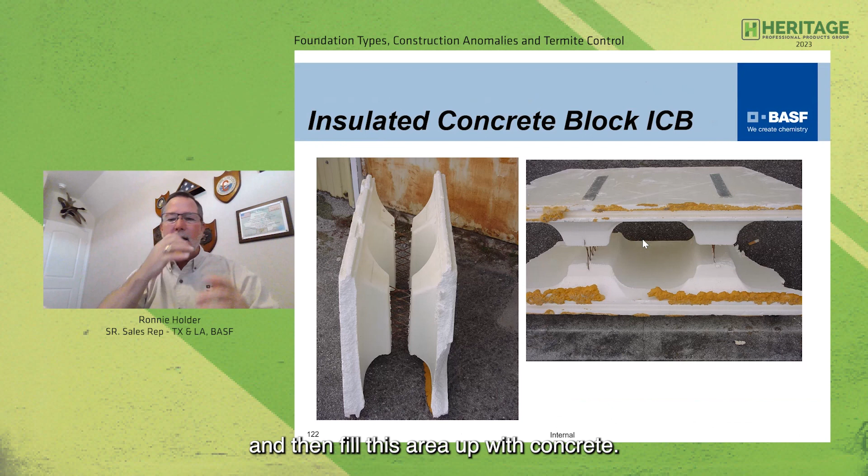This is our insulated concrete block, or ICB. What they do is sit these on top of pieces of rebar and then fill this area up with concrete. Very difficult and unique construction. Now, even though that ICB is treated with 2,000 parts per million of boric acid, and 1,000 parts per million of Suspend or deltamethrin, the termites marched through it like Sherman through Atlanta. They did not care. Even with those two insecticides impregnated into that area, that foam insulated board provided no protection against subterranean termites.

This is the latest issue that I have run into over the last 2 to 3 years. This is post-construction spray foam insulation in attics and in living space wall voids. Number one, we have a totally inaccessible area. Number two, this hides any and all moisture penetration from roof leaks. And number three, the Termidor labels SC and HE are very clear that you cannot foam in these areas, because this closed cell spray foam insulation will not accept any termiticide, any liquid whatsoever.

So, I know this is brand new, to be energy efficient and all this kind of stuff. I've even been in brand new crawl spaces, only 4 years old, where the contractor sprayed this underneath on the bottom of the floor in the crawl space. So how is a termite professional ever going to figure out where the issues are if we have issues with Formosans and or our eastern subterranean termites?

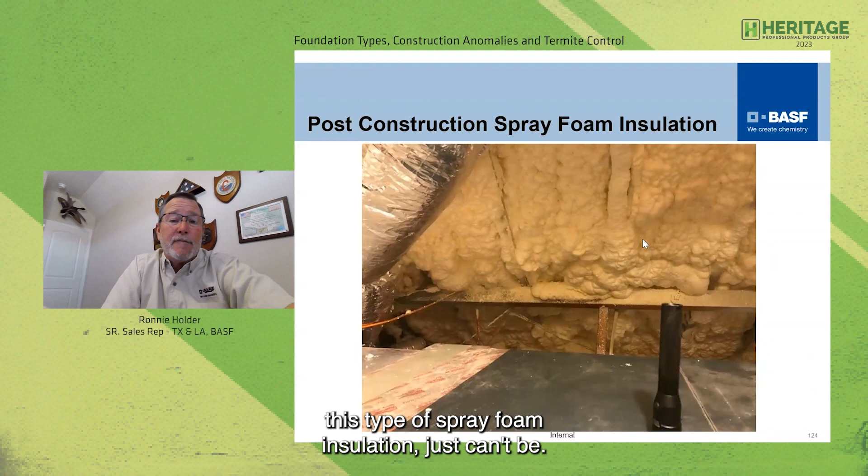So if you're doing your diagram, document, take pictures. You cannot be responsible for any termite damage based on this type of spray foam insulation. Just can't be. And I would certainly address that in my contracts that I give to my consumers as well. There's some more of it.

Here's a great picture I took in Thibodaux, Louisiana. This was above a garage. It was a man cave above a garage. And guess what? The spray foam prevented anybody from seeing the Formosans, and they've actually eaten that ceiling joist all the way up. I think they had to replace 2 or 3 of them. It was just a nightmare. So make sure that you document any spray foam insulation that you run into.

We talked a little bit about stucco and how stucco always has some overpour and the soil is always above the slab. So we had an issue with this house, and we've got the overpour. You see that. So what we did was we dug up the overpour, and then we took soil samples. Okay. And that's a piece of the overpour in Dr. Bob's hand, and it was 3 to 4 inches deep.

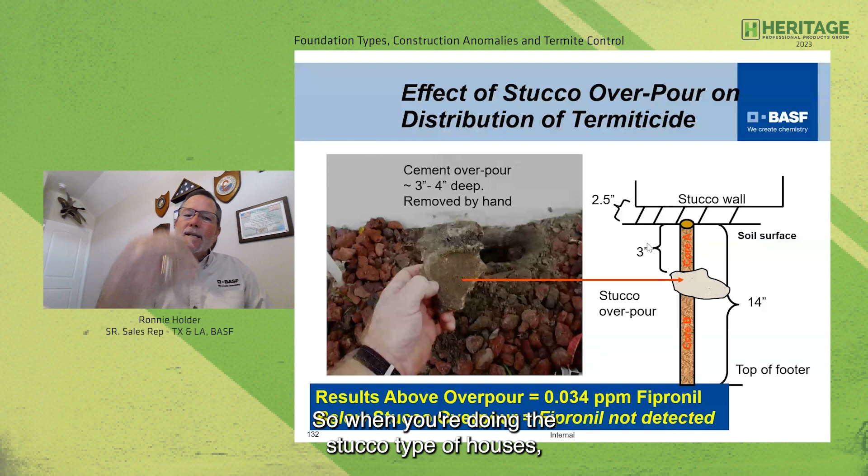But what happened was, above that piece of overpour, guess what? There was plenty of Termidor above that overpour to kill subterranean termites. But below the overpour, there was no Termidor detected. So when you're doing the stucco type of houses, you've got to make sure that you get your trench deep enough to make sure we're getting it adjacent to where the slab is.

Okay, we're wrapping it up here, folks. So on the left, prior to going to the job site, there's a lot of good things that you need to do. And one of my biggest things is, second one from the bottom, is calibrate. Hopefully every one of you calibrate your termite rigs at least once a year. Maybe in February would be a good time, but you need to know how much material is coming out of the end of your application tool.

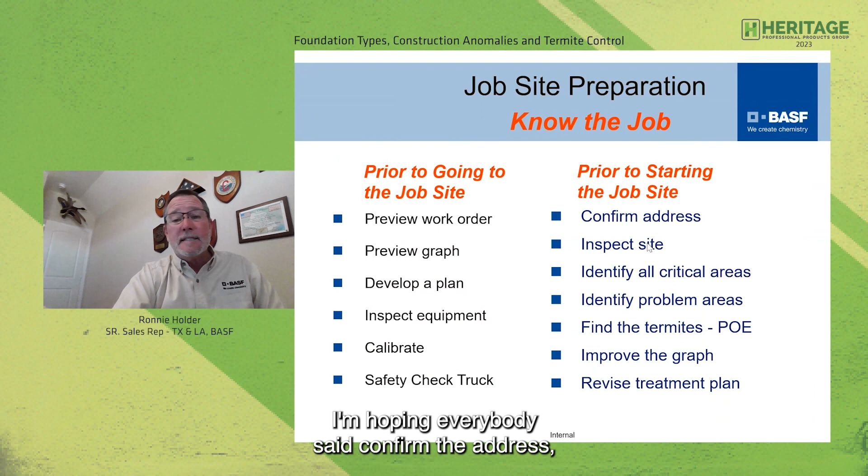Had a customer in the last 2 years hit a water supply line while they were down drilling inside of the structure. Did not know where the water shutoff valve was. The water damage did more damage than the subterranean termites would have ever done.

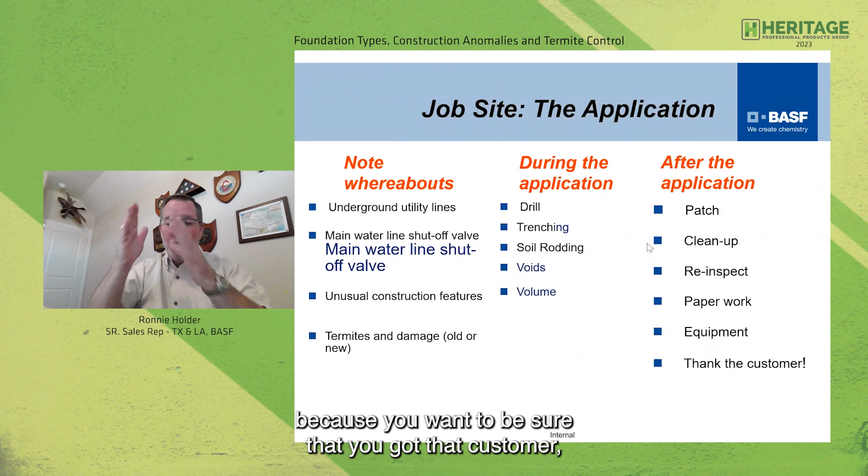Hopefully everybody says thank the customer, because you want that customer. You want to be sure that you got that customer, their friends, their kids, their grandkids. You want to have 3 or 4 generations of customers. And by cleaning up, being neat, and thanking that customer for their business, that will help you achieve that.

Okay. So remember, the goal is to protect the structure from foraging and infesting subterranean termites. Each structure is unique and may require adaptation from normal protocols. Try to have the tools available to provide the best method of control for the structure. If things go weird and things aren't working the next year, you got to think outside of the box to figure out where that entry point is and what tools do I need in order to solve that problem.

Okay. And with that, this is for my attorneys. Always read and follow the label directions. Refer to the label for registered uses. Uses not included on the label have not been evaluated for human and/or environmental safety. Use of products for non-labeled uses is a violation of federal law and can result in human and/or environmental hazards.